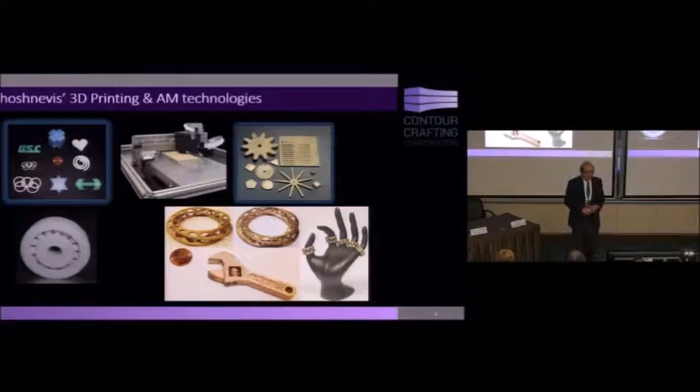I've been involved in different 3D printing technologies very early on. This is one of the early technologies I developed called SIS, Selective Inhibition Sintering. Now it's being used by more than 10 companies, with commercial products in polymeric and metallic, and more recently ceramic parts. It was during research in this field when I observed that they're extremely slow. It takes a long time to build even small objects. My concern was really speeding these processes up.

That's how I came up with the idea of contour crafting. I wasn't thinking about large-scale structure construction, I wasn't thinking about building construction. I just wanted to make 3D printing faster. Then I noticed there's really no way other than making the layers thicker. But if you make the layers thicker, you lose surface quality, especially on slant and curved surfaces, you get this staircasing effect. So contour crafting was an idea which would allow you to build with thick layers and yet maintain smooth surfaces.

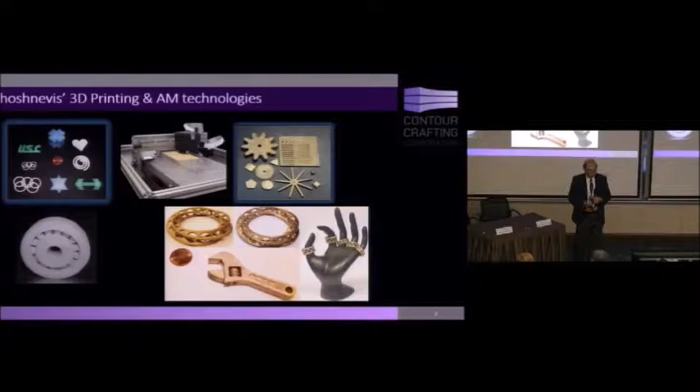My first focus was on some industrial objects, and it took a few years before I thought about construction. 3D printing builds layer by layer. This is the issue that attracted my attention. I noticed in 1994 that the only thing humans have ever built in a layer-wise fashion are actually buildings, right? Bricklaying is a 3D printing method, and we have been doing it for thousands of years. That's when I developed this conviction that the best use of 3D printing may actually be in construction, which has got a huge economic volume worldwide.

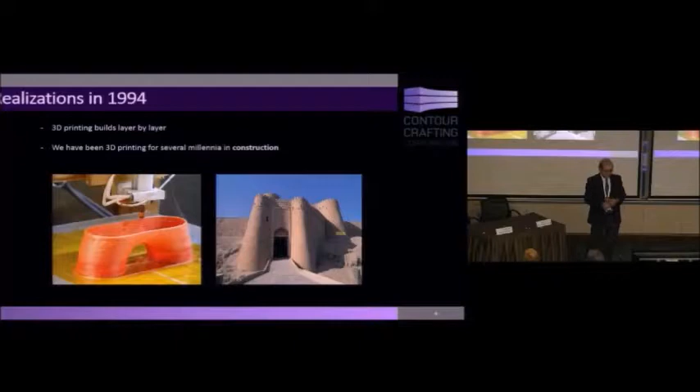It's typically the highest sector everywhere. In the United States, it's the highest sector of economy, for example. 3D printing builds layer by layer, and we've been building structures like that for many years. That building is in southern Iran, entirely made out of clay and straw, adobe material, and it's 2,500 years old, 3D printed. Contour crafting is, as I said, a basic, simple concept. There is a nozzle with a large orifice, material comes out of it, and the material is smoothed out by a trowel that changes angle on the fly under computer command. As you see here, the structures I built have an extremely smooth surface quality.

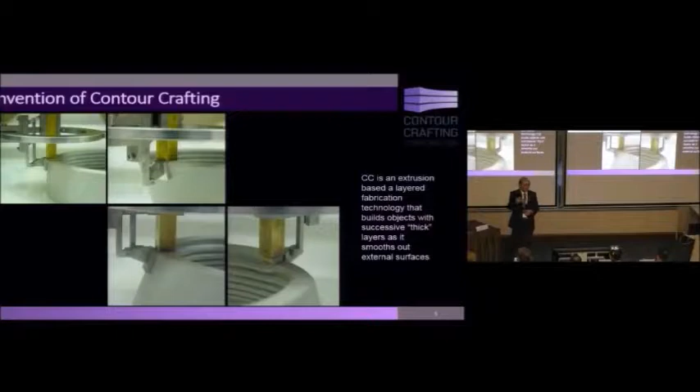This is a form of clay. In this particular thing, the layers are 6 millimeters, but the surface quality could be like 2 microns. This was unprecedented, and it still is unprecedented.

No 3D printing can actually make surfaces as smooth as contour crafting when you use it at a smaller scale. In the early days, I created a number of specimens to just show the potential of the process with different computer models. It showed that all kinds of curvatures are possible, even sharp corners you can make, and then hybrid processing of multiple materials would be possible.

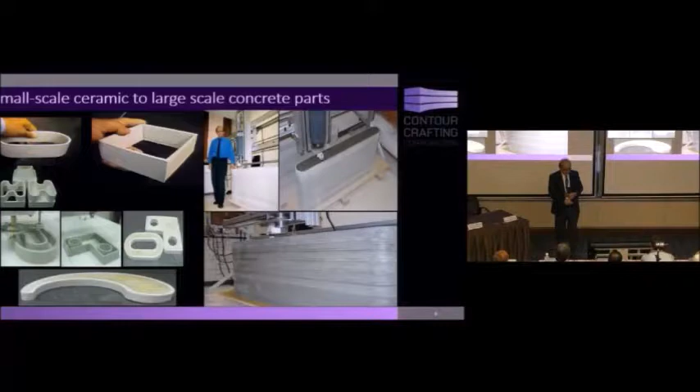This is basically a gypsum-based material, and inside is another construction material. And then later on, I developed different scales of the machine, and this has taken, of course, a lot of effort.

Students ask me, well, you're lucky, you stumbled on a good idea, and you managed to do all of this. And I tell them I spent 3,000 hours writing proposals. That's the reality of it. 3,000 hours almost writing proposals to get money. It wasn't easy, right? At the beginning, nobody believed in it, right? And it's been a long journey, with a lot of effort behind it.

I'm telling this for the younger groups. Things don't happen easily. You have to be at it. You have to first believe in it yourself and dedicate yourself to it, okay, when there are a lot of non-believers around.

Just talking to a student here who's after what is the next big thing, I want to get into that, right? Oh, blockchain is a big thing, let's get into that. No, you should create the big thing yourself. Somebody created blockchain, somebody created the internet, right? But doing that takes effort. It takes passion. It takes vision and a lot of dedication.

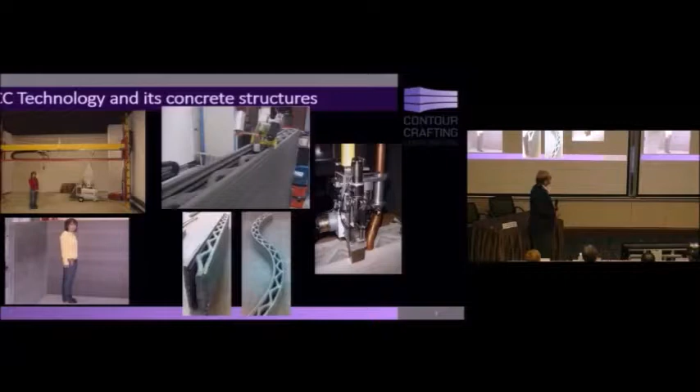Anyways, as you see, this nozzle can build hybrid walls at the same time, 3 different extrusions. These things were done in 2006. Still the most advanced nozzles that have ever been seen, at least by myself, anywhere around the world. That was the first large-scale machine that we built.

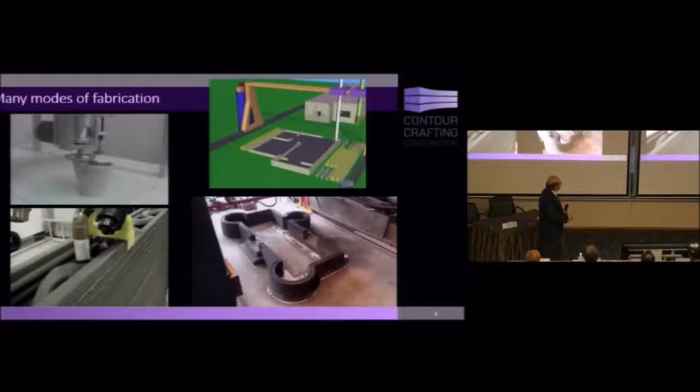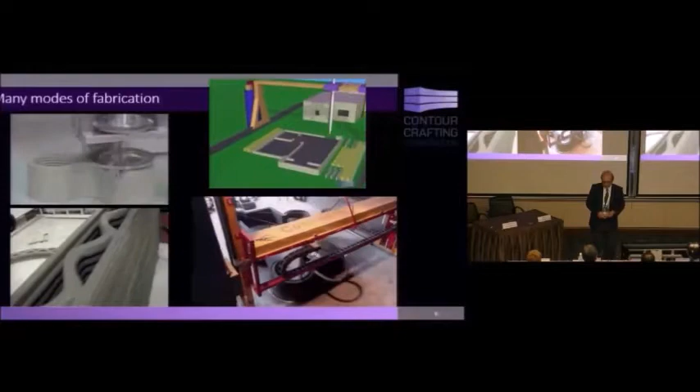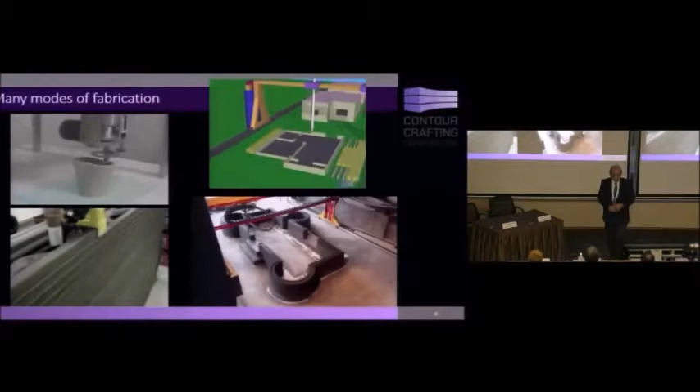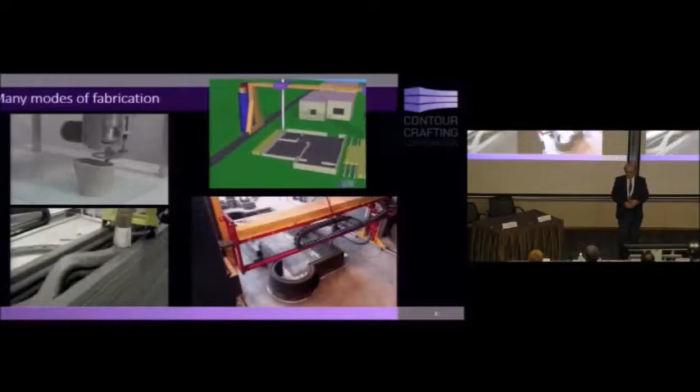And these are some of the implementations that you see. We built a lot of different specimens with different materials, different structures. But I never attempted to build a building and demonstrate it as a viable building, because I have to get there first. And I don't think anybody has really got there that much. But I respect all the effort that has been going on, and I welcome all of them.

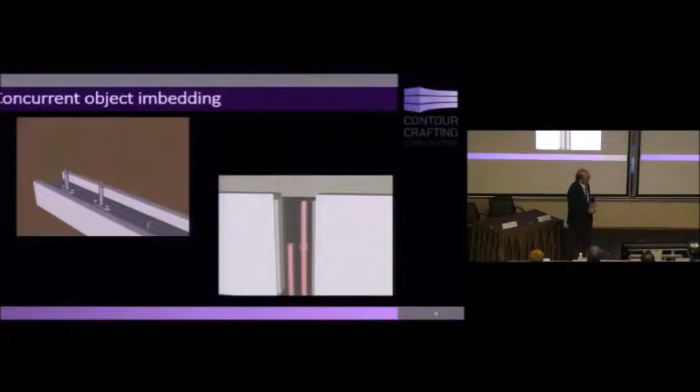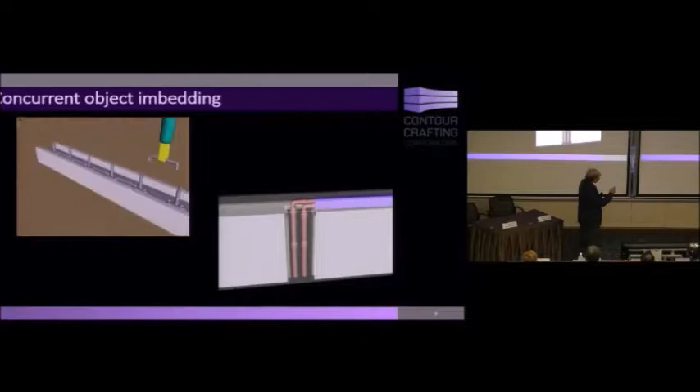So, along with the concept of 3D printing, I also entertained the idea of embedding other objects inside the structure, including reinforcement and plumbing, even electrical network.

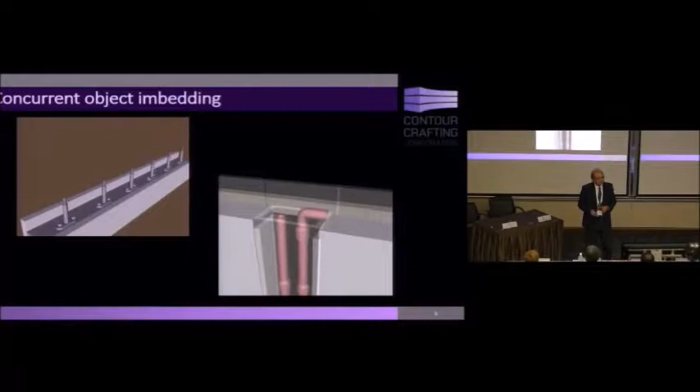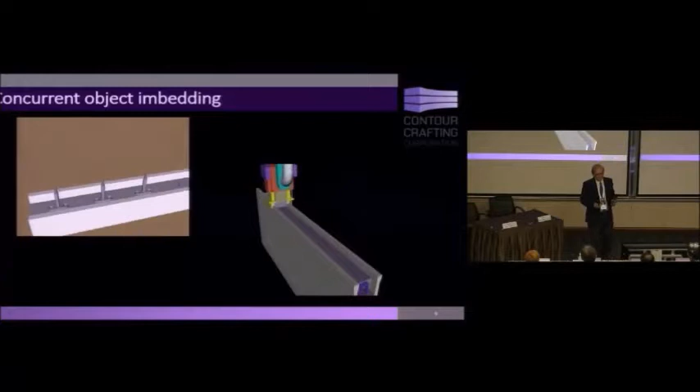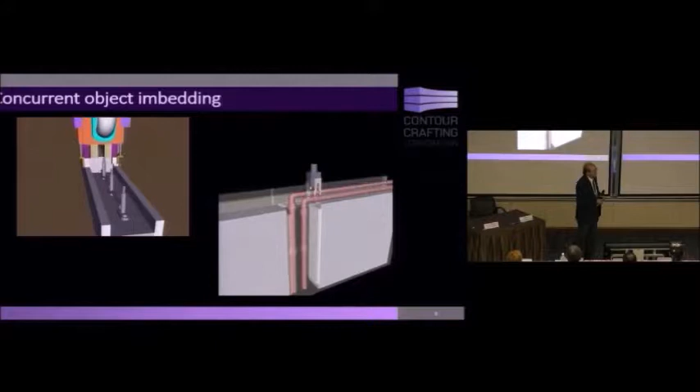To me, buildings are much simpler structures than a lot of other things that we manufacture, like cars, right? Cars are extremely complex, they're made out of thousands of parts. Precision is much higher than buildings. And yet, the entire thing is almost done automatically these days for certain cars, right? Buildings are relatively simple. The only difference really is that they are not mobile. They don't use standard material that we use in manufacturing. They use special, cheaper materials in high volume, and they're large. These are the 3 distinctions of buildings.

Okay, so later on we did a lot of other studies, incorporation of steel fiber into the system, continuous coil embedding, sensor embedding using conductive concrete.

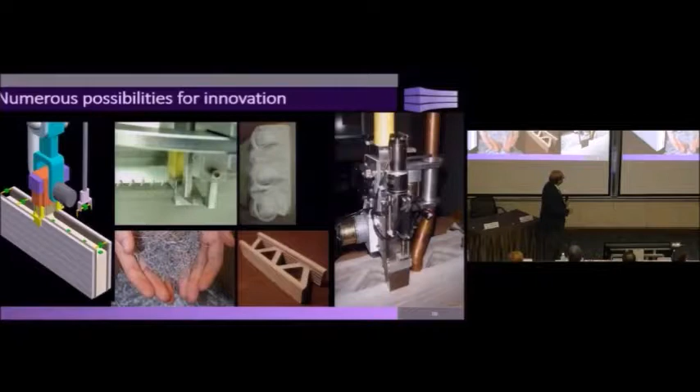Things don't move that fast in technology development. If you read about it, you'll notice some of the technology - jet engine took about 40 years since its inception, since its invention, till it actually flew by commercial airliners.

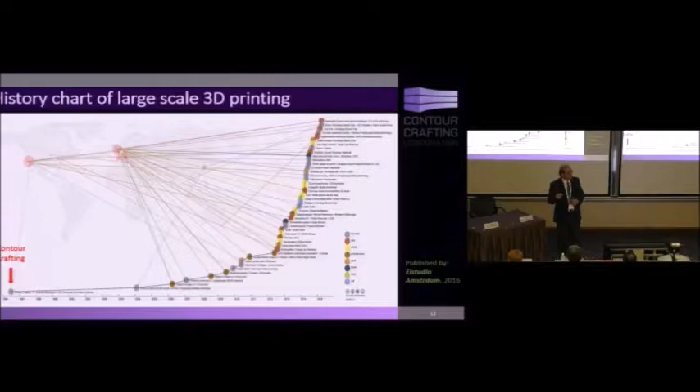When Graham Bell invented the telephone, it looked like a slam dunk at the time of telegraph. But the president of Western Union back then made a famous statement - said when people have telegraph, who needs telephone? And he was very right. He was a very smart businessman, because we are talking about the time when there was no wiring. Even electrical wires were not in buildings. People were using kerosene to lighten up their houses.

So the infrastructure was not there.

Similar things are true about automated construction, whether it's 3D printing or robotic constructions. It's not just building something, there's a lot of other things that go with it. Right now, in the course of construction in the United States, like 10 or 12 times, the inspector from the city comes and looks at it, and sometimes you have to wait a couple of weeks for them to come. It doesn't make sense to have the speed of building a building in 24 hours and then wait several weeks for inspectors to look at different aspects of it. When you think about the complexity of inspection and regulatory requirements, you understand that we have a long way to go.

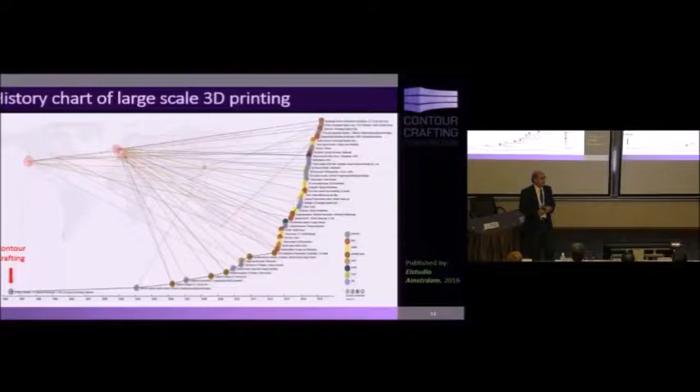At present, there is a shortage of 800 million houses worldwide according to United Nations statistics. Global markets are grossly underserved. Nearly 2 billion people are homeless and living in slums. Annually, about 40 million people lose their houses due to war and natural disasters. Just look at all the refugees of Iraq and Syria right now, what's going on in the world. So many millions of them need houses around the places where they have taken refuge. There's also a shortage of commercial and industrial buildings.

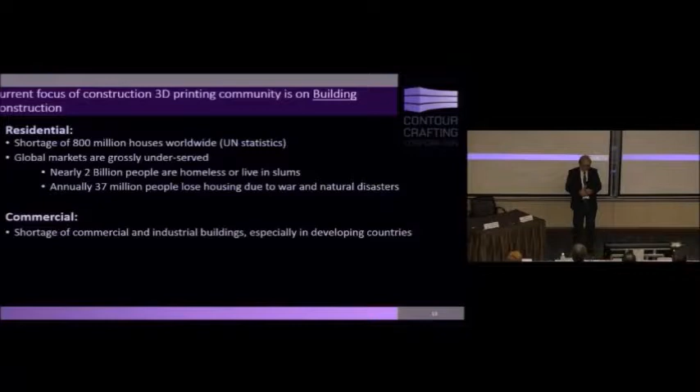The demand is there, and there are many reasons why construction needs to change. As I told you, it's the biggest sector of almost every economy. Labor efficiency is low, skilled workforce is vanishing. In every country I visit, I notice construction workers are coming from adjacent poorer countries, because people in that country are not willing to work in the construction field. I was in Malaysia and the workers came from Indonesia. I went to Iran, construction workers are from Afghanistan, Iranians don't want to do it anymore. In the United States, it's all Mexicans, right?

Control of construction sites is difficult. I saw somewhere they were building an apartment complex with 400 apartments, and there were only 2 supervisors, and yet the building was being built - the drywall, patching, everything. A lot of it is uncontrolled. People don't know exactly how things were made, whether it was according to code or not. We are at a time when in manufacturing we are doing 6 Sigma quality control. It's just a big divide between the two industries with respect to quality control.

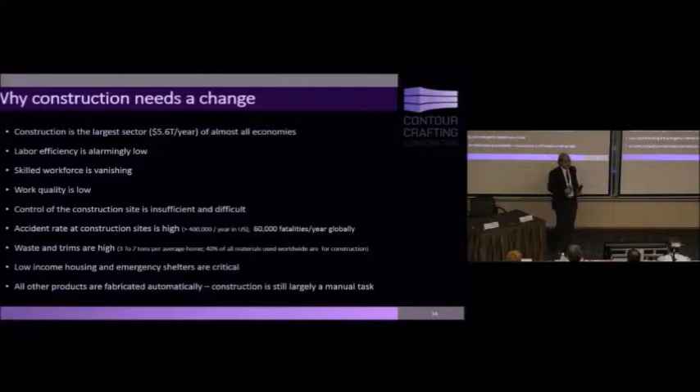Construction causes a lot of accidents - 60,000 fatalities every year globally. That's a lot. In the United States, it's like 6,000 fatalities, 400,000 injuries, a lot of them spinal cord and so on. Waste and trim levels are high, low-income housing and emergency shelters are critical needs, and all other products today are fabricated almost automatically, except buildings, right? Just look around yourself - this thing has been made automatically, my shoes, clothes, a lot of these things are done automatically. Nobody builds things by hand anymore, except these buildings.

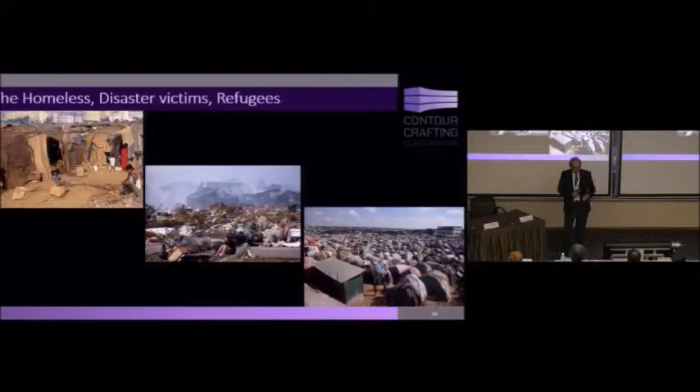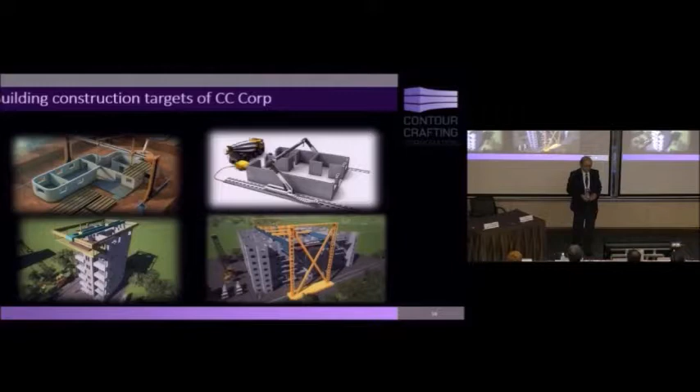So there are reasons that it has to be automated. As I said, the homelessness disaster and natural disasters are on the rise because of global warming and the refugee situation. The company that I created has building construction as one of its main goals, but we have not limited ourselves to it because of all the reasons that I gave you. We're going to try our best, and our vision, of course, extends to all kinds of buildings.

But there are barriers against implementation, as I told you. Construction is a conservative industry. Over the years, when I started this, there was a lot of excitement - a lot of people sent me emails, thousands of emails, a lot of telephone calls, a lot of visits by construction companies, but not a single one was willing to put a little bit of money toward R&D. So if they want somebody else to pay for it and then they'll use it when it's ready, that's understandable - they're not in the business of supporting R&D.

They typically have a short planning horizon. They want to be quick in making profit from their investment. There's a low profit margin in construction, right? There's a lot of competition in it, and there are a lot of regulatory barriers. As I told you, inspection is an issue. In certain areas there are labor unions. In the United States, for instance, if you make something that allows a painter to reach higher, they're not going to allow you to sell that brush with a longer handle, because it improves productivity and that's not good for the laborers. It could be that bad.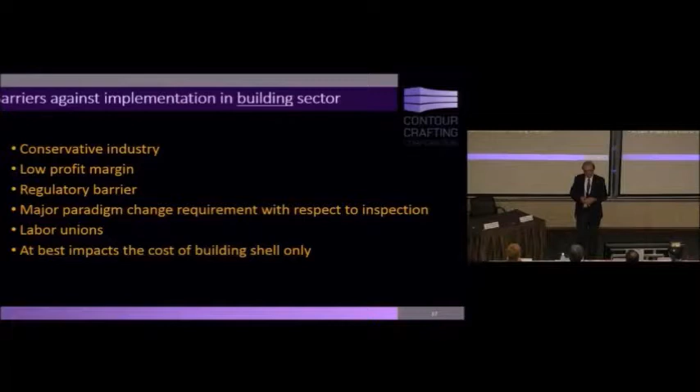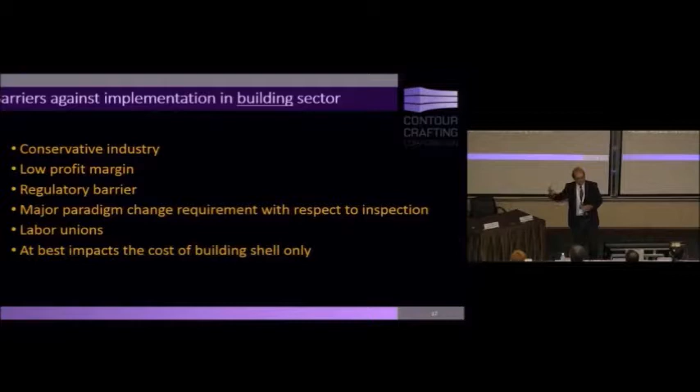Another important issue is that when we talk about 3D printing a building, we're not talking about really building a building. We're talking about building a shell of it, primarily the walls. Those of you in construction know what percentage of the cost of a building that is—it's not the biggest part, actually it's a small proportion of the overall cost. There's a lot more that goes into a building. So when we talk about building construction, we have to know what it is we're talking about. That's why I thought about integrating other activities like plumbing, electrical, and others into the building construction.

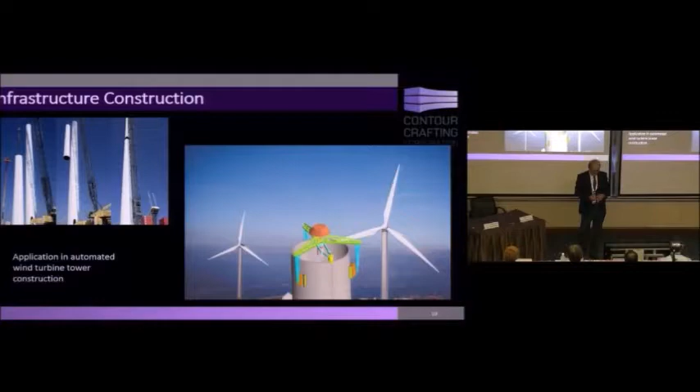So what is the future? Our focus in the company is also on infrastructure. Large structures are not only buildings. For example, one area is tower construction. The company Siemens gave us a feasibility study contract to look at the possibility of building towers for wind turbines. They build over 1,000 towers every year for wind turbines. There are other companies that are even bigger—they build 2,000 per year. So it's a hot market. We developed a concept for automated tower construction.

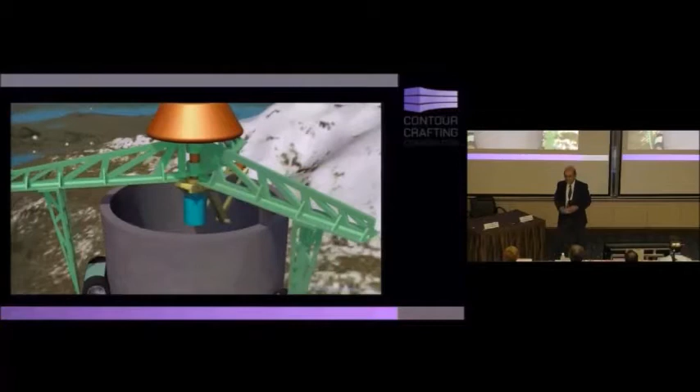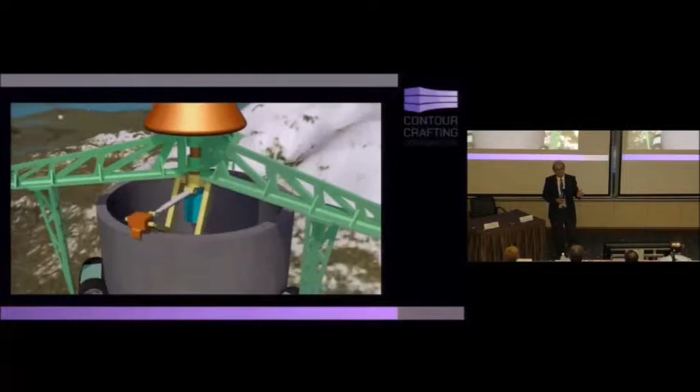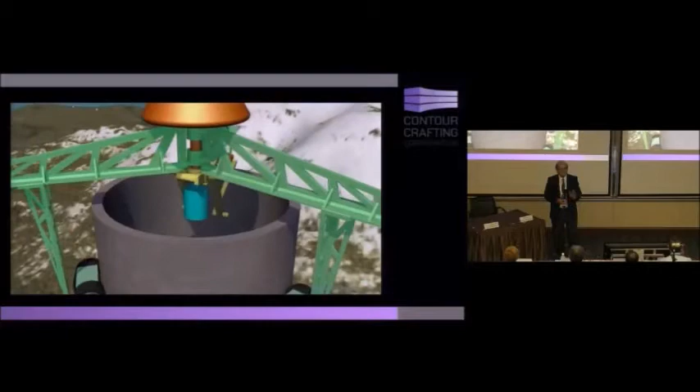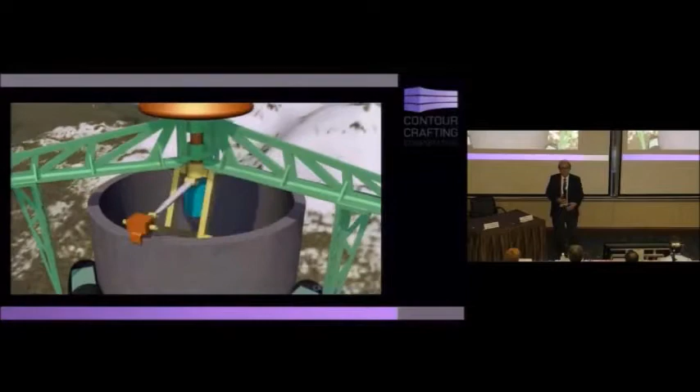The tower is the most expensive part of a wind turbine establishment. For a 1 to 2 megawatt turbine, it's like $1.2 to $1.5 million. Over $500,000 is for the tower, almost $150,000 for the foundation. The rest is for the generators, the blades, and the transformers. So the tower thing is important.

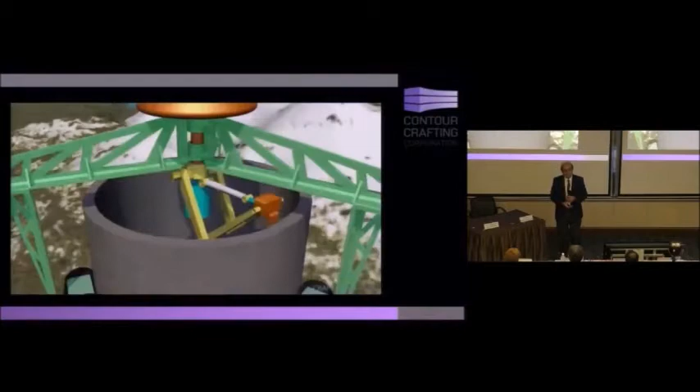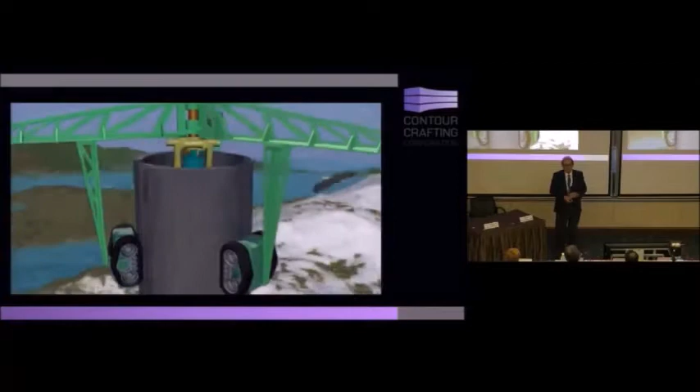Of course, if you can build towers, you can build chimneys, water towers, silos for agriculture—that's a different direction with potential. And regulations are probably less stringent, since you're not building in the middle of where people live. These could be in isolated areas.

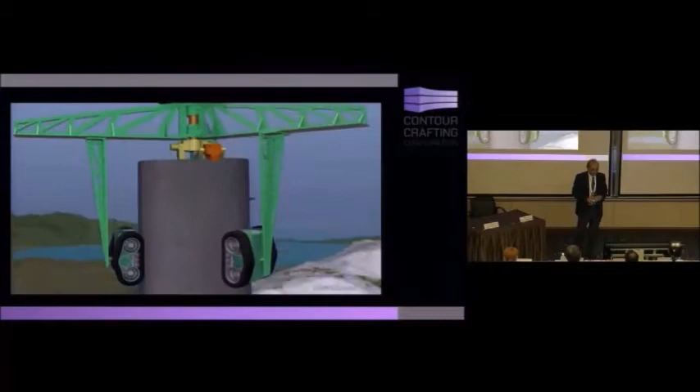Pylons, like for this Hyperloop, Elon Musk's idea—a couple of companies approached us for building these pylons using this technology.

I'm fascinated with the idea of space, because I think the future of humanity is in space. A lot of people don't take space technology seriously. Many consider it a waste of taxpayers' money while they're using a cell phone to talk to the other side of the world, unaware they're using satellites—space technology. They're driving around using GPS, that's space technology. Weather forecasting is space technology. All these television programs we receive on satellites are space technology. There was a vision that made this possible. At the time, a lot of people thought it was outrageous, crazy. But now we see it happening. So I'm telling you that in the not-so-distant future, there will be more manufacturing done in space than on Earth.

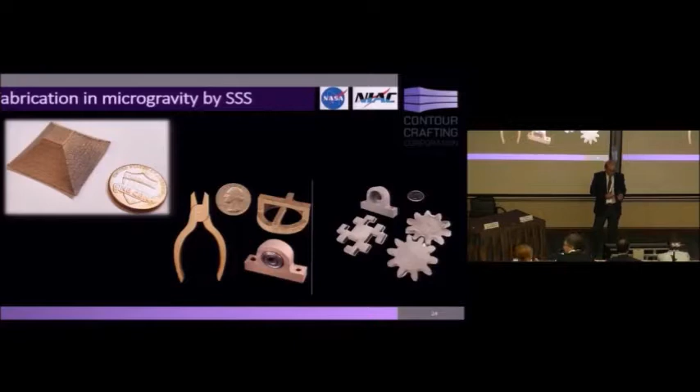So 3D printing in space has a lot of potential. I'm going to go over this quickly, but there are a number of companies working on mining, not only on Moon and Mars, but also on asteroids. These companies are funded. Remember, this is not a fanciful idea - people have put their money on it.

So this was a project funded by NASA for building on Moon and Mars using contour crafting. This is a proposal I wrote to them, and it was a very competitive program. About 800 proposals were submitted, mostly by NASA researchers, and they selected 30 of them, mine was included. Then we went to phase 2. Among those 30, they chose 9. I was included again, and the last one that was received for the 3rd phase was our project.

So the idea is to take the material there and convert it to structures that are buildable without water, without hydraulic concrete. And so this is some of the demonstrations of Martian material - material that has been processed using whatever is on Mars without taking any material and without water.

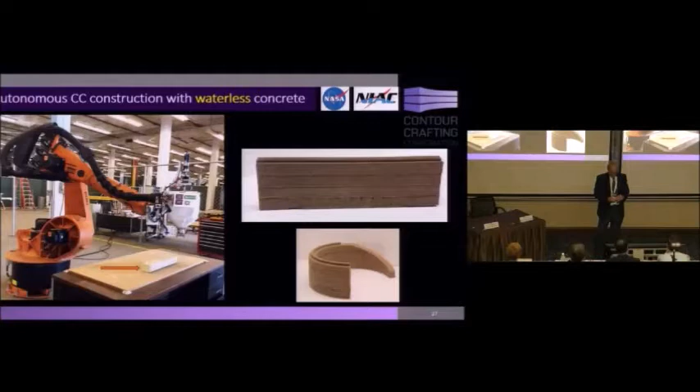We have built these structures. This is a thermal process, sulfur-based binding. So you can build hangars for landers, for example, shade walls, radiation protection walls.

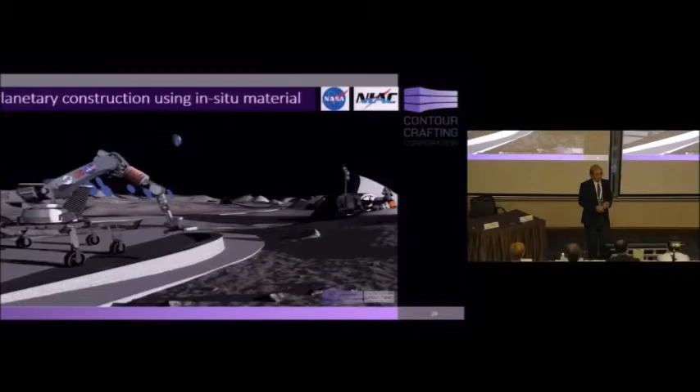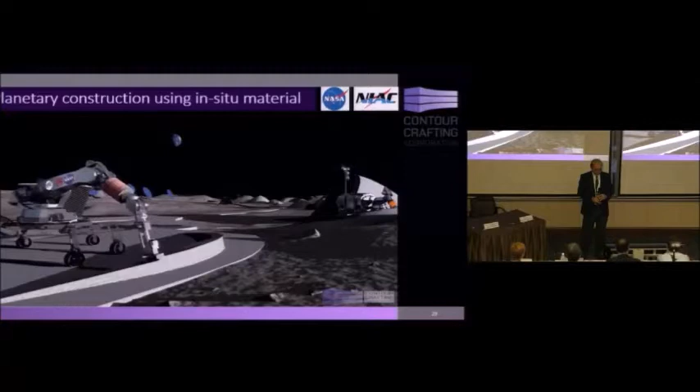In the case of lunar situation, the idea was you just take the lunar soil and melt it, much like volcanic lava, because the temperature under sunlight on the moon is too high - it melts sulfur. For Mars it's excellent, but for the lunar situation you cannot do that. So here is melting of the material with microwave, powered by solar panels.

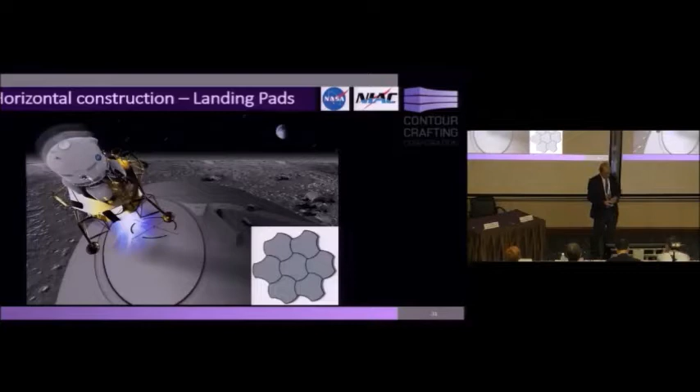And as it was said, this received the grand prize. Next was the landing pad. Landing pad is one of the most needed structures, infrastructures for the future of human expeditions. On other planets right now they all land on soft soils.

So this is another version of this SSS for cementitious and ceramic parts that we have developed. As you see, this is the only powder-based large-scale technology. You haven't heard much about it yet, but you will as we make some very large-scale demonstrations.

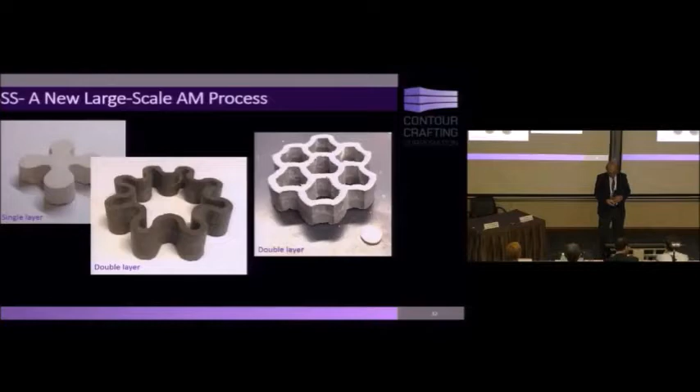So this layer here is about 1 inch, and it's powder. As you see, it's very smooth, 2.5 centimeters. This is lunar soil, and is converted to ceramic, high-temperature ceramic. These are interlocking tiles.

Landing pad must be made out of interlocking tiles, because if you make it out of one monolithic piece, because of temperature differentials of the exhaust plume of the lander, you're going to get a lot of cracks and a shattered lander.

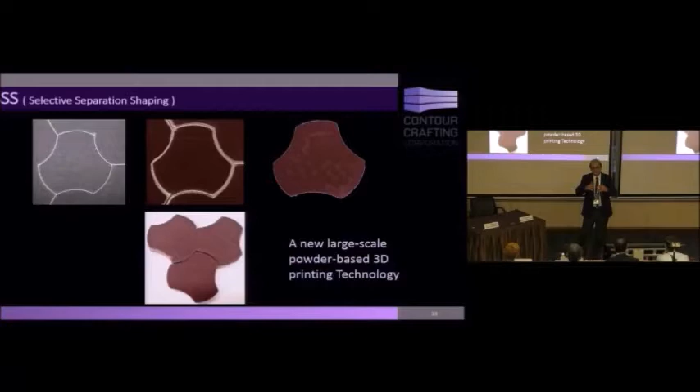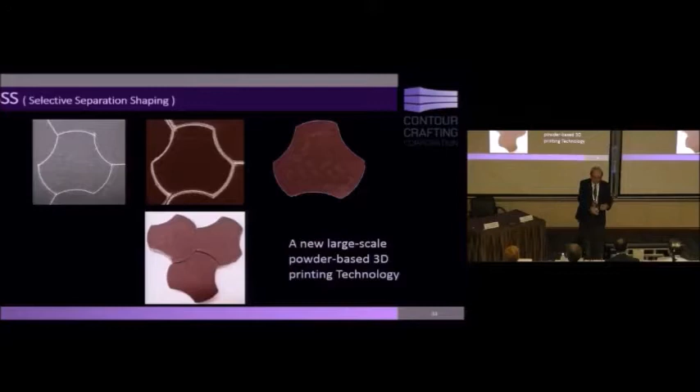So these have to be basically 3D printed in place, and that's what we're doing. Other ideas that have been proposed involve a factory that uses molds to make these, and then a robotic system to bring and assemble them. But what we proposed was basically to build them in place using a simple rover.

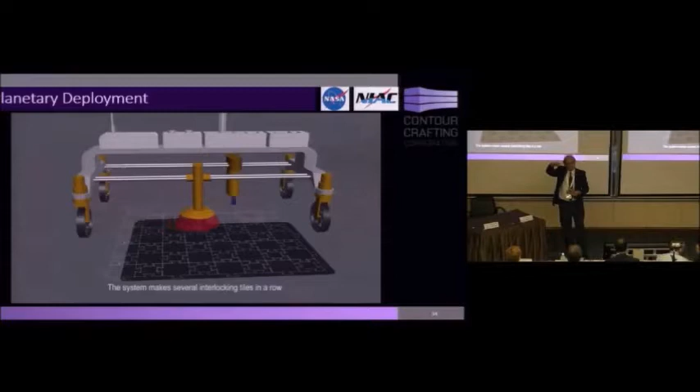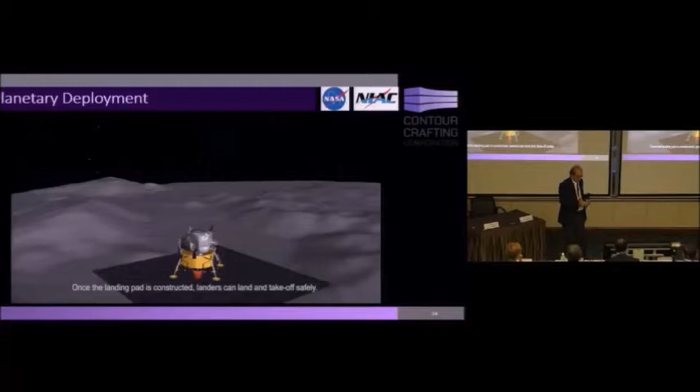Right now that lander that was shown, this is how the situation is today. The landers land and the exhaust plume pushes the dust away. If the bedrock is not horizontal, if it is a slant, the lander could flip over and you lose billions of dollars of the project.

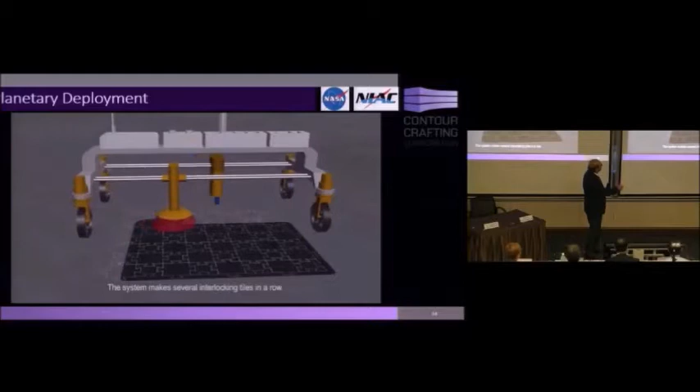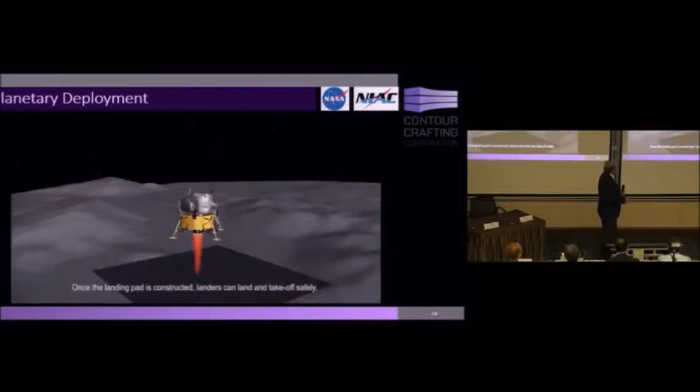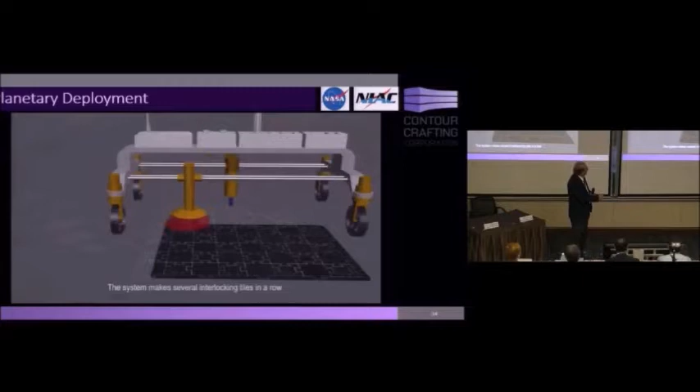Yeah, so this is the idea, to build landing pads just out of in situ material. So what you see here is basically a nozzle that extrudes magnesium oxide, a very high temperature ceramic, which is abundant both on Moon and Mars. It is much higher temperature than the local soil.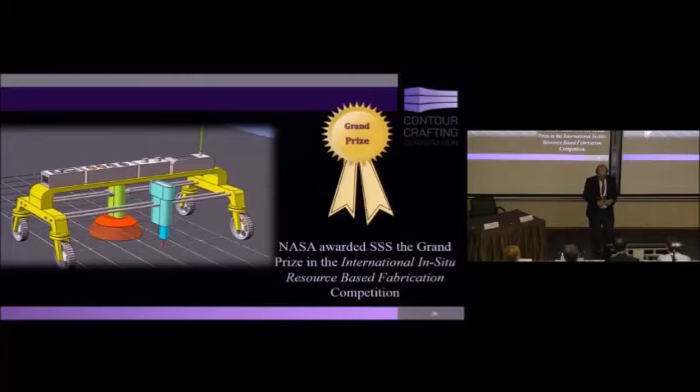I'm showing this because of the future potential of 3D printing. It is not only on Earth, it's going to be also very effective in space applications. So the other research directions, of course, are process innovation and improvement, different ways of making it, different robotic structures. At the company, we are trying some very radical ideas.

Material choices - we should be more open-minded about the choice of materials. Given that it's an automated process, people need not be around. Maybe we can do things with super high temperature, maybe with some chemicals that are not good for people to be around. Now that we are doing it automatically, maybe it's okay.

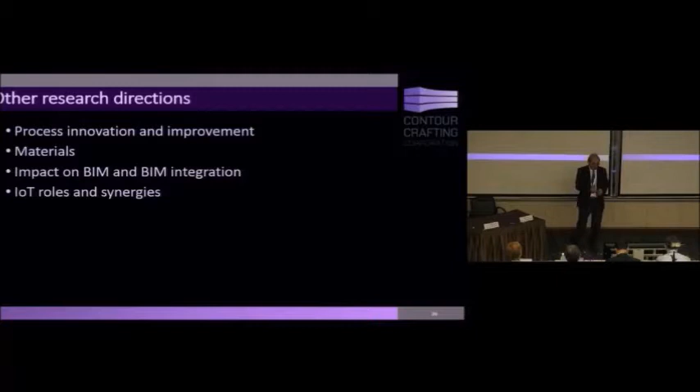Impact on BIM and BIM integration, that's another direction that has to be taken into account. I can later on, if anybody's interested, elaborate on the BIM part. IoT, Internet of Things - there's a lot of roles for incorporation of that.

As I said, in 2017, a company called Doka, I hadn't heard about them, in Austria, showed interest. At that time, of course, there were a lot of other people who wanted to invest, but I chose this company because it's very relevant. They make very high performance, high-tech formwork, self-rising formwork, and some of the biggest buildings in the world - actually the tallest building in the world is made with their formwork, Burj Khalifa in Dubai.

And so they realized that if 3D printing really becomes successful, there wouldn't be need for formwork. So they didn't want to make the mistake that Kodak made in not going after digital photography. They didn't believe it would ever take over. So this is a smart company. They're number one in their field, multinational. I consider myself fortunate that we have a relationship with them.

And in May of 2017, almost a year ago, we leased this building near the LAX airport in Los Angeles. It's about 35,000 square feet, 3,500 square meters. And this most likely is going to be our R&D facility.